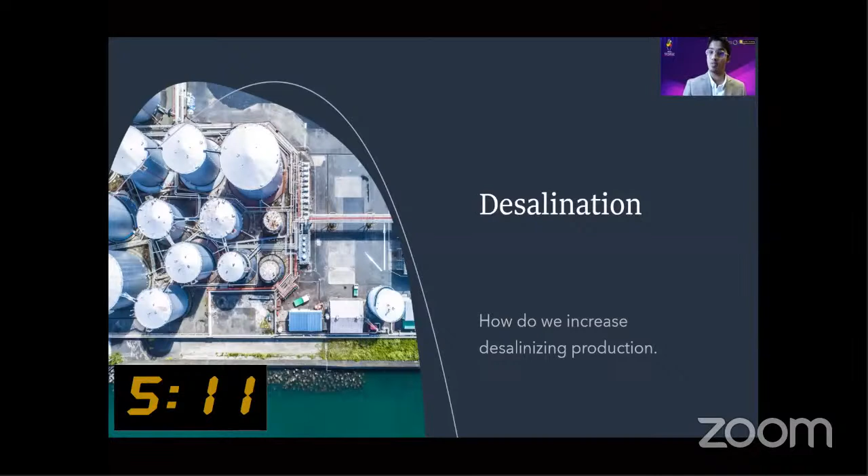It is such a great pleasure for us to share some of our ideas that we have come up with to increase the production of desalination plants in Dubai. But before going to those methods and ideas, what is desalination? It is the removal of salt and impurities from seawater to produce fresh water.

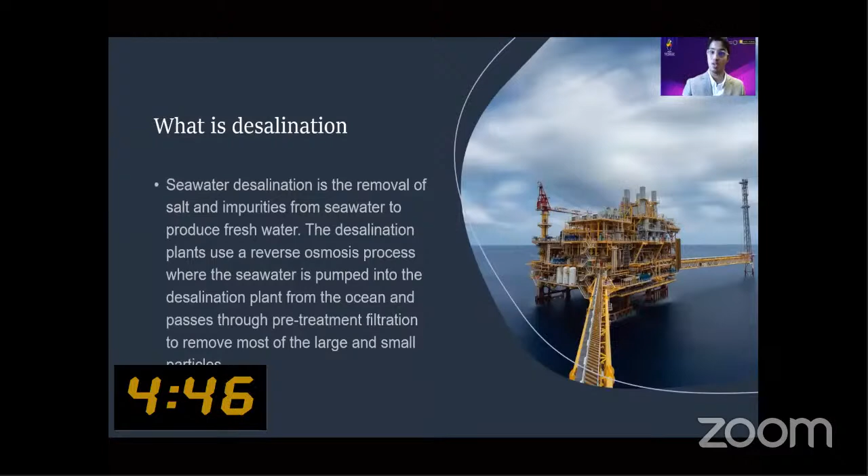And the process which is used in these desalination plants is something called the reverse osmosis process, where the seawater is pumped into the desalination plant from the ocean and passes through pre-treatment filtration to remove most of the large and small particles. So basically, we've come up with three different ideas or three different methods. These methods not just increase the production, but are also eco-friendly and quite sustainable.

So the first thing is we've come up with an IoT device for a more affordable and efficient desalination process. Here we will use an IoT device that splits components of brine through a method called electrochemical water salt splitting. The water salt splitting separates the brine into positively charged sodium and negatively charged chloride ions with the use of an electrochemical cell, which is a device that employs electrical energy to kickstart chemical reactions.

Once the bonds are broken, sodium and chlorine combine with other elements to form new chemicals, including sodium hydroxide, hydrogen, and hydrochloric acid. Doing a little bit of research on this, we could identify that this process not just reduced the cost, but also outperformed the conventional water splitting method. Number two, it can improve the desalination design to save operating costs while generating revenue. And the new approach could also help cut brine disposal costs.

But what surprised us the most during the research is that up to a third of total desalination expenses relate to brine disposal costs. So using this new method, we could help cut brine disposal costs, and we can also avoid damaging environmental impacts, because the current brine disposal methods can cause salinity and acidity spikes, along with oxygen-deficient conditions in waterways that kill or drive off animal and plant species.

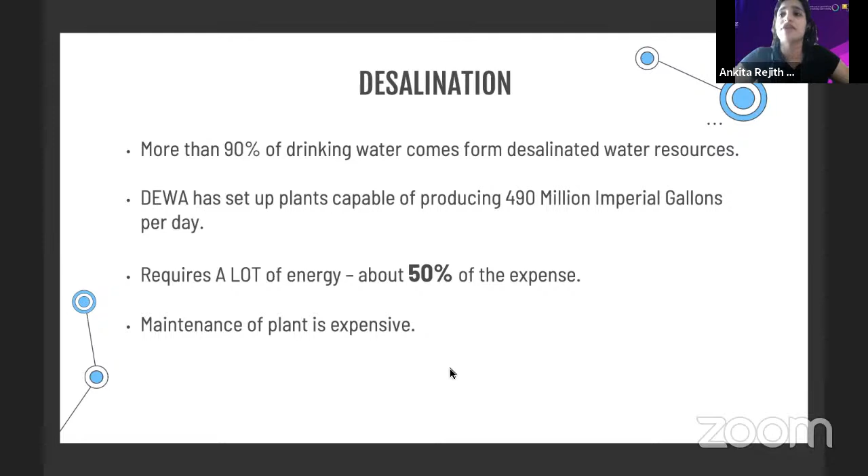We don't have much groundwater in the UAE, and more than 90% of drinking water comes from desalinated water resources. DEWA has set up desalination plants capable of producing 490 million imperial gallons per day. And the process of desalination requires a lot of energy, and the plants are also very expensive to maintain. Energy is reported to be the largest single expense for desalination plants.

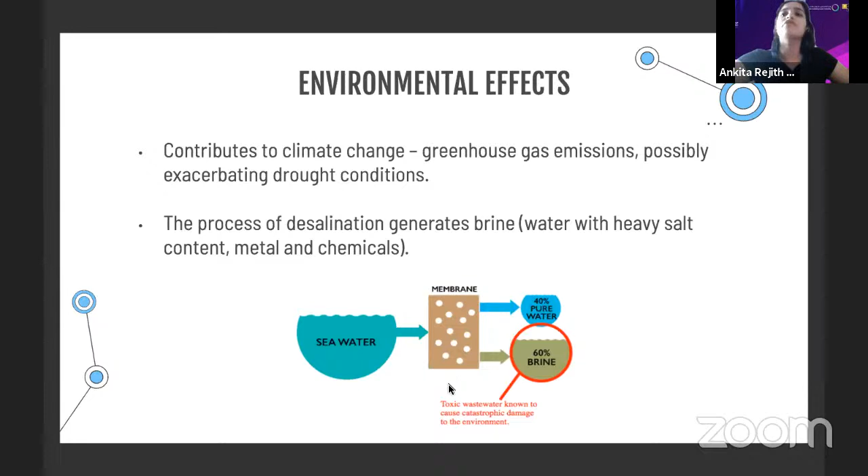Besides that, water desalination can have serious implications on the environment since the process can generate toxic waste such as concentrated brine, which is harmful to aquatic life. The massive amounts of energy used in desalination contribute to climate change, causing greenhouse gas emissions. And we have to deal with wastewater as well. A more sustainable alternative that must be considered is thermal desalination. It can be achieved through solar technologies, which are capable of producing large amounts of heat, which can be utilized in evaporating the saline water.

Our solution is to install solar-powered sensors in the plant that can give information about the water levels, heat, and salinity. This information is then transferred to a cloud computing platform that can observe, analyze, and compare data. The solution is based on narrowband IoT LPWAN technology. And we have sensors that have photovoltaic cells and AI to monitor the different levels. Now, this removes the requirement of installing mechanical components that are expensive.

This makes it cost efficient, which will help in reducing the water and electricity charges of the consumers, which makes them happy, which is also a goal of the Dubai government. And the proposed solution is also environment friendly as renewable energy is being utilized.

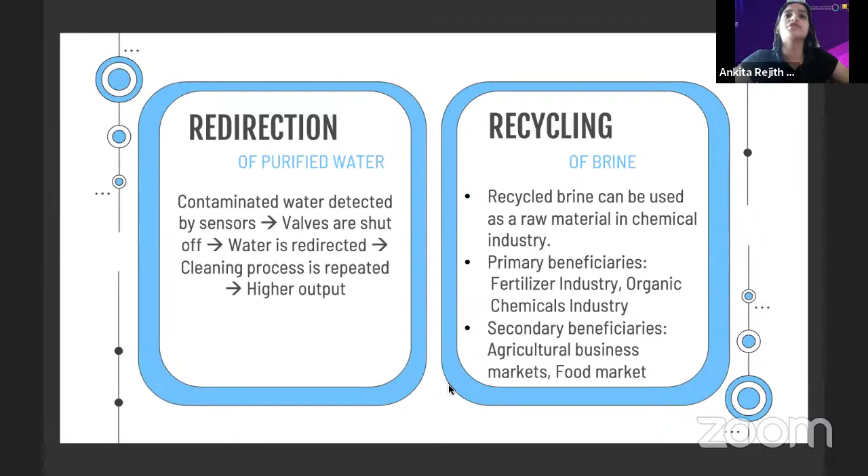Now, for the purified water, the sensors that detect contaminated water will give an alert, which will redirect the valves to be shut off. And this will initiate the cleaning process, which would be repeated until higher output is achieved. And the brine that we're left with can be used as raw materials in different industries, such as the chemical industry, fertilizer industry, or can even be used in agricultural business markets. Now I'll hand over the presentation to Suhani and Drashti.

In the PESTEL analysis, looking at the political factors that our solution affects, the UAE's commitment to the Paris Agreement with the target of reducing emissions by 25% before 2030 means establishing the Internet of Things framework and cloud network with our solution, which will increase the longevity of the solar farm and also make solar energy production in the UAE more reliable and a more effective substitute that can eventually substitute electricity originating from fossil fuels.

And the cost reducing measures that are enabled by our Internet of Things solution would mean that increasing the general level of happiness within the public will also be possible with our solution, which is one of the many priorities in the 2030 Dubai vision.

Now, moving on to the economic factors. DEWA's recent public listing and the increased productivity and efficiency created by our solution means there will be an increase in confidence in the stock market towards DEWA, and possible equity capital will be received from stockholders. This equity capital could be used to offset the initial startup costs of putting in our sensors in the desalination plant, and would also be used to further develop other sustainable solutions that DEWA departments are trying to adapt for Dubai's energy demands.

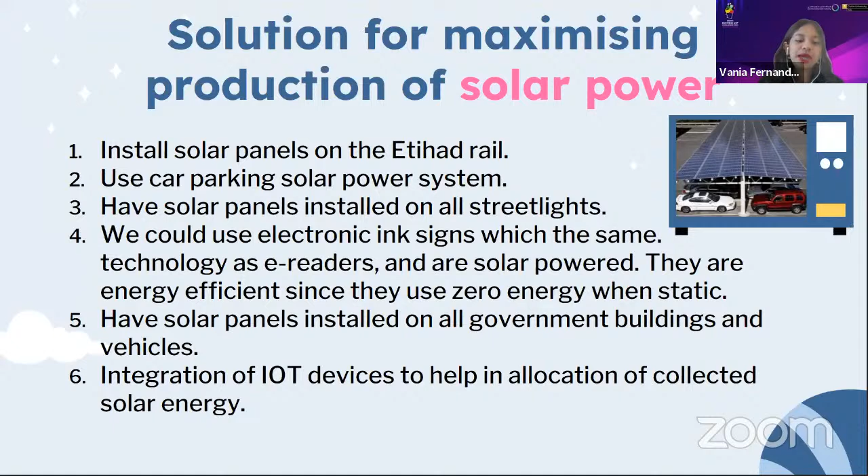These are our solutions to help maximize desalinized water produced by DEWA facilities. The first thing is that solar power panels can be installed in all desalinization plants. The solar energy derived from the panels can be used to fuel the desalinization machinery since it uses an extreme amount of electricity. This would help decrease fossil fuel dependence and save on electricity consumed.

The problem with desalinization plants as of now is that they have increased fossil fuel dependence and emit a lot of greenhouse gases. Not only that, but they are a threat to marine life. Sea life can get sucked into desalinization plants, killing small ocean creatures like baby fish and plankton. We would not want this since UAE is a country focused on environmental protection.

So what we can do is save on the electricity used for desalinization plants, and use this money saved and put it towards marine life conservation. The next point is that using solar energy can also help increase productivity, since sustainable solar power can produce more than 1.5 gallons per hour for each square meter of solar collecting area.

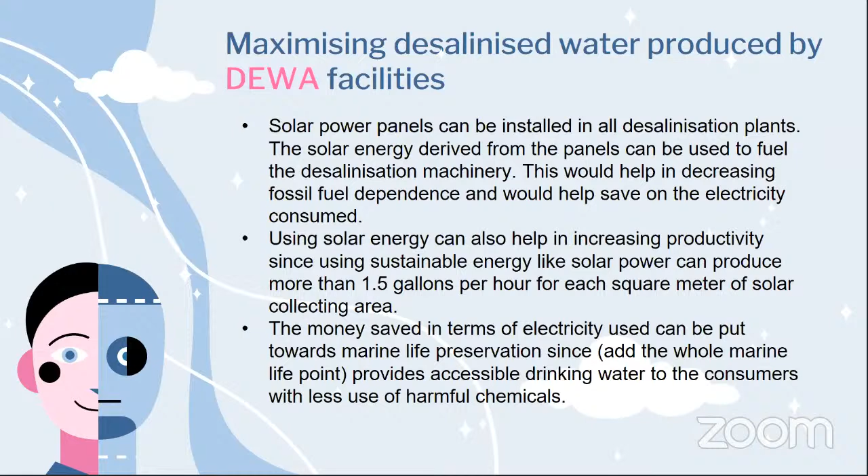Next. This is the SWOT analysis that we have conducted. The strengths of our proposed idea are that it saves money, increases productivity, and reduces dependence on fossil fuels.

However, the weaknesses are that it takes a long time to install the solar panels, and the initial cost while switching to solar power can be quite high. The threats we face are that it requires compliance from various departments—we need the government buildings involved, the parking lots involved, and a whole lot of things.

There is also a long period of time for implementation, since the cost savings of solar power energy come only in later dates. The opportunities are increased environmental benefits—we can reduce our dependence on fossil fuels and gain a whole bunch of environmental benefits from using sustainable and renewable energy sources. The money used on electricity expenditure can also be allocated to various other ventures.

I would like to take this time to talk about our financial analysis. We would definitely need a lot of money to install the solar panels. However, that is just an initial cost—one you have to think about only at the time. The benefits are for the long term.

We can use the money that has always been put towards electricity and put it towards so many other projects of great importance, such as saving marine life. We can also help develop the environmental protection projects already existing in the UAE. Thank you.

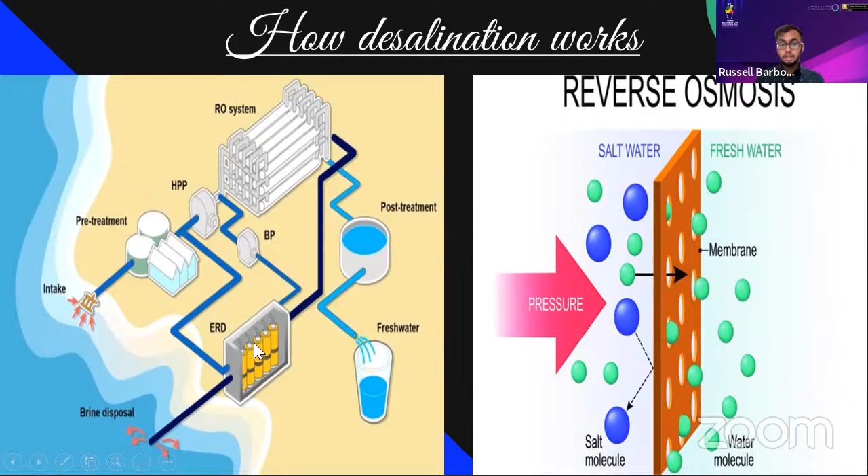I will skip this for now, as we all know how solar panels work. The advantages of the process: obviously these two processes use renewable energy, which is almost unlimited, and that's why we are seeing a shift of countries towards using these processes.

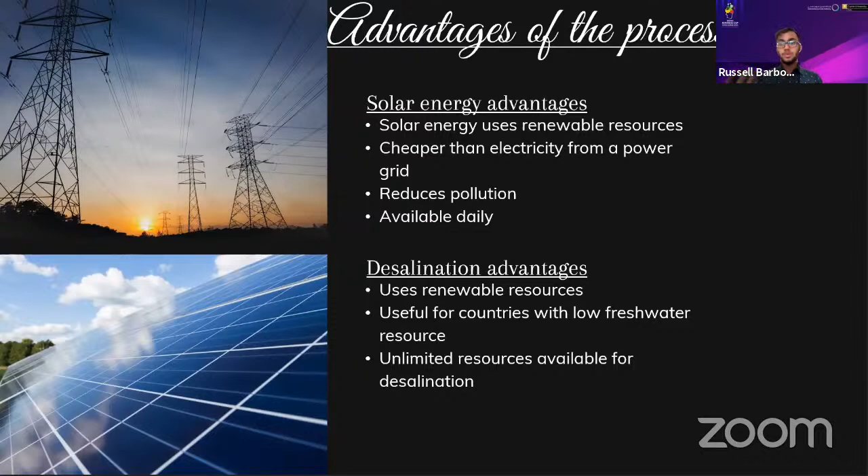Now, the disadvantages of these processes are what this solution is trying to address. The disadvantage of solar energy is mainly overheating; if the solar panels overheat too much, they become inefficient, so we are not getting our money's worth. Similarly, in desalination, the membranes involved could be fouled, meaning large particles get trapped on the membrane, reducing its efficiency.

Our solution is threefold. First, we will talk about cooling solar panels using IoT. This 60% brine solution from the desalination process is eventually sent into the sea, affecting its salinity and harming marine ecosystems and sea life. Instead, we plan to use this brine to its best efficiency. Under cooling solar panels using IoT, we will place an aluminum jacket under the solar panels, and the brine solution will be passed under the jacket, thus cooling the panels.

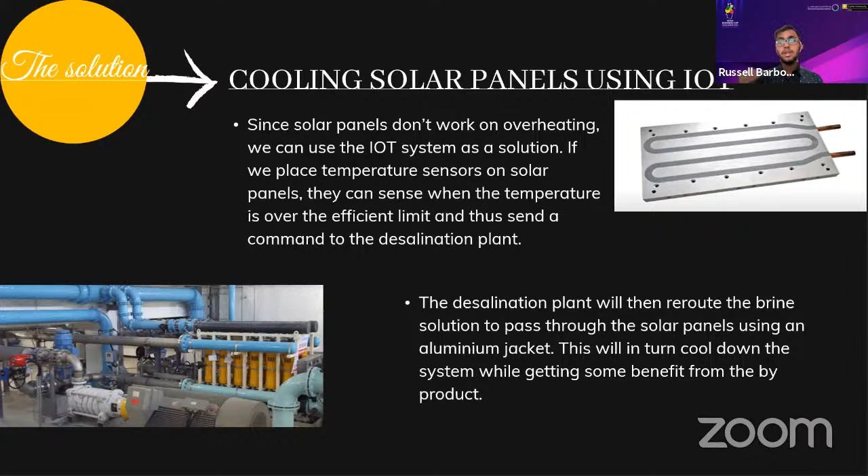To integrate IoT into the system, we will place sensors on top of the solar panels. Depending on the configured heat temperature, if it's hotter than it's meant to be, it will send a message to the desalination plant, which will proceed to reroute the brine solution under the solar panel using the aluminum jacket.

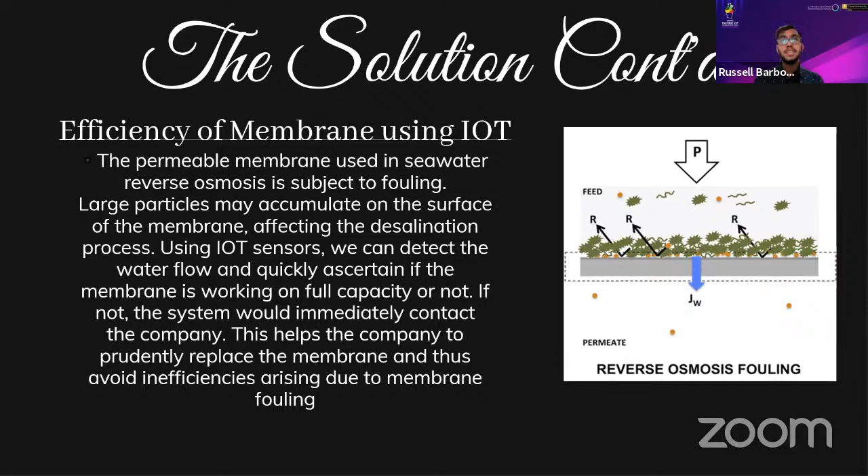Also, the efficiency of the membrane using IoT. As I mentioned, the membrane can be fouled, meaning large particles get trapped on it, reducing its efficiency. Using IoT sensors, we can assess the water flow and analyze whether the membrane has been fouled or not, reducing time wasted due to the inefficiency of the membrane.

This is where the brunt of my solution lies. This brine solution can finally be used for a salinity gradient power plant. In the salinity gradient power plant, we account for the difference in the salt concentrations of two solutions. In this case, it will be brine and seawater, and we can use that to generate electricity.

How this works. As you can see in the diagram, there are two solutions, and water moves from the dilute solution to the concentrated solution through a membrane. This generates electricity, which can further increase the energy production in the country. At the same time, using a process known as membrane distillation, we can also produce excess fresh water, which means that this process is not only using waste products, but we're also generating more energy and water for the community.

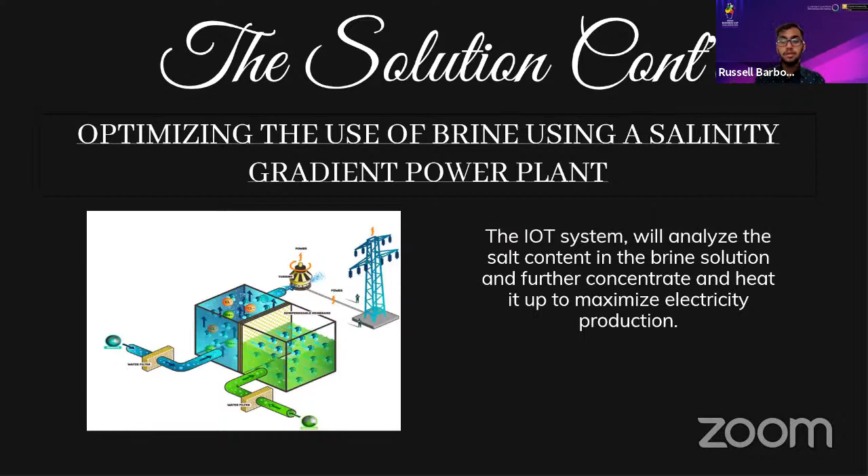The PESTLE analysis. The salinity gradient power plant is a relatively new process, and it has barely started on a large scale. Therefore, it may be important for the government to talk to companies that sell membranes related to the salinity gradient power plant and achieve good prices for the product. Also, the membranes in the salinity gradient power plant are 3 times more expensive than normal membranes.

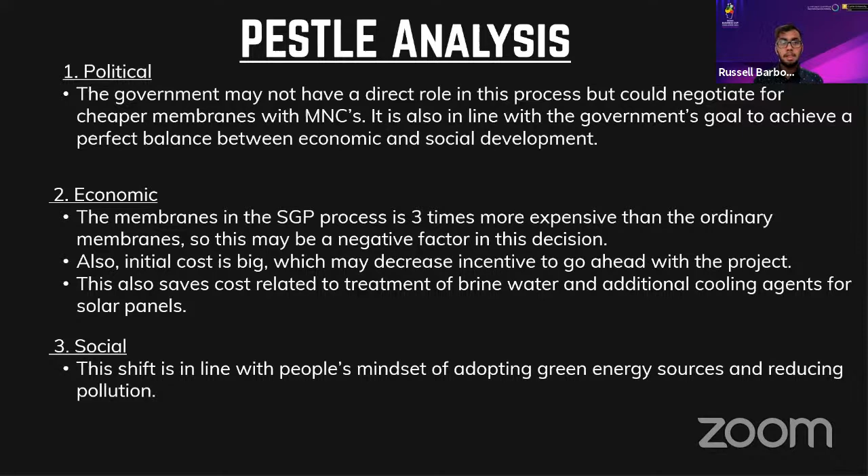Next, economic. Obviously, the startup costs of this solution may be large. However, as I will explain later, this will provide a lot of economic return. Social. There has been a shift in people's mindsets about global warming and the negative effects of pollution in the community, which is why this is in line with that. Technological. We are integrating the IoT system in this process, which is why we are also technologically advancing the two processes.

There are also patents. Again, as I said, this project is relatively new, which is why patents will also need to be acquired. Environmental: solar energy and desalination of water are both processes that produce less pollution for the environment, which is why they are good for the environment, and why this process is necessary.

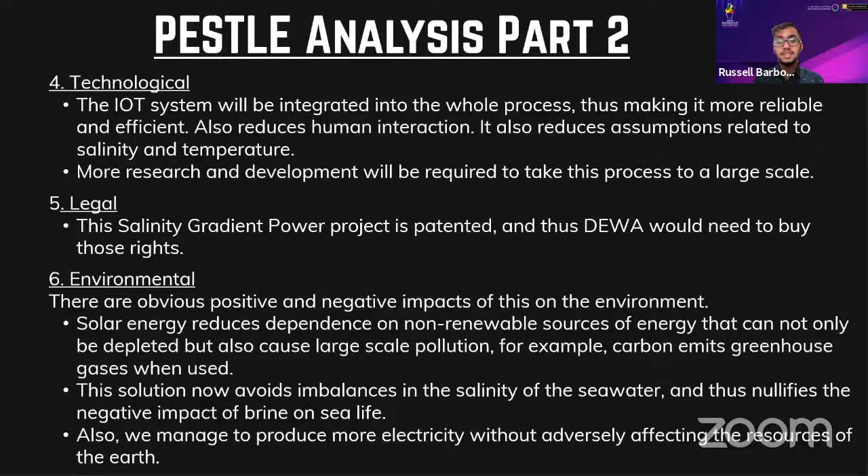The financial plan. As I said, this process is a relatively new one, so finding specific values was hard. However, we could find that the levelized cost of electricity is 0.21 dirhams per kilowatt hour. This means the cost of producing 1 kilowatt hour; it is basically the total cost divided by the energy produced. So the cost per 1 unit of energy produced.

Now, as you can see, DEWA sells electricity at a minimum of 0.23 per kilowatt hour, whereas the levelized cost of electricity under the salinity gradient plant would be 0.21 dirhams per kilowatt hour. So we will thus be making a profit from this process. So overall, the feasibility of the salinity gradient plant is good, however, this has only been adopted on a small scale. So to take it to the next step, DEWA would have to spend money on research and development and various improvements to the process.

However, we are saving a lot of the electricity that has been wasted on the brine, and we are also generating enough electricity to meet the needs of the desalination plant. So we're basically establishing a cycle where the desalination plant will not need any excess electricity.

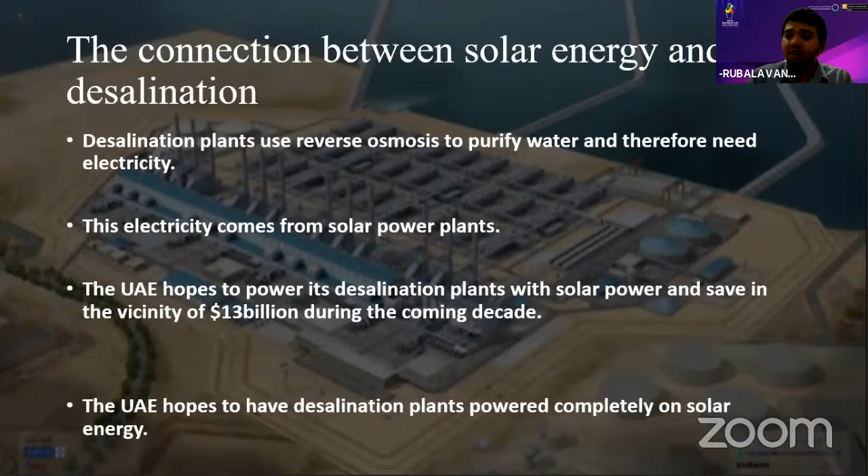Given this, after extensive research and analysis, the biggest problem faced by solar power in the UAE is dust and sand buildup. Dust and sand buildup can reduce the efficiency of solar panels by up to 40%. And research suggests that in the Arabian Peninsula, more than 80% of energy loss is attributed to dust and sandstorms. It must be noted that the UAE has a very dusty climate.

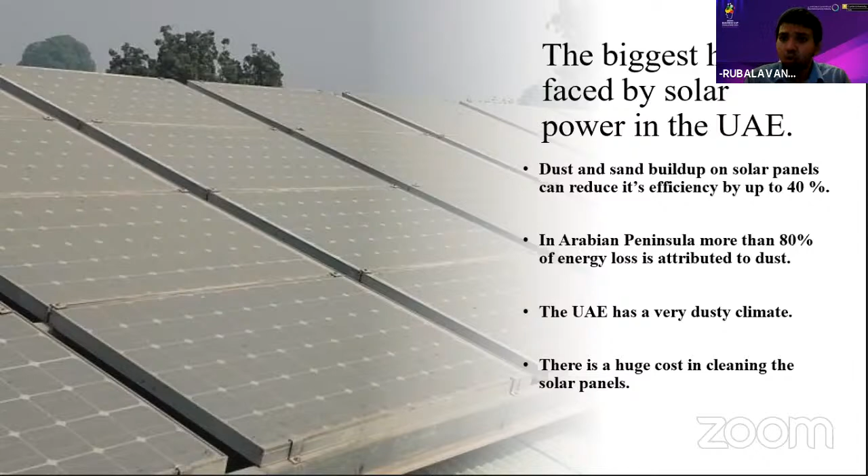There is a huge cost in cleaning and maintaining solar panels right now. The current approach to cleaning these panels is not well coordinated. It is not very proactive. There are some cameras that can monitor the dust, and steps towards being proactive are taken, but it is not very proactive. The current cleaning methods require staff that need to stand by all the time, and sometimes they are wasted because there is nothing for them to do. Therefore, there is a total lack of efficiency and productivity in this current approach.

The solution that we have has three main components. Two are technological, based on IoT, and one is mostly political and organizational. First, I will explain the technological solution. There would be IoT sensors and associated water splashers installed in solar panels. These IoT sensors, as suggested by researchers from AUS this year, can increase the productivity of solar panels by up to 50%. These IoT sensors will be connected with data mining and data analytical tools in the UAE and later in all the other GCC nations.

I call for a complete integration of the IoT sensors with all the tools DEWA has to maintain its solar power plants. After a few years, DEWA will be able to predict which panels, especially what parts of the panels, become dusty at which points in time. Therefore, repair and maintenance can be done much more proactively than it is being done.

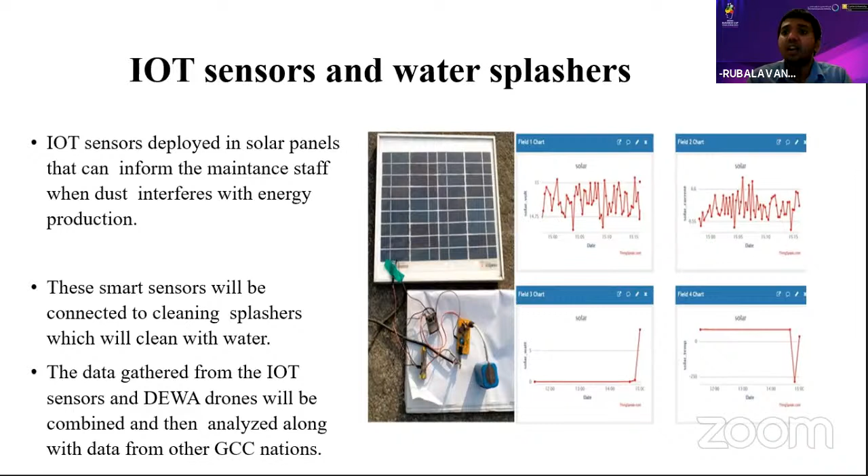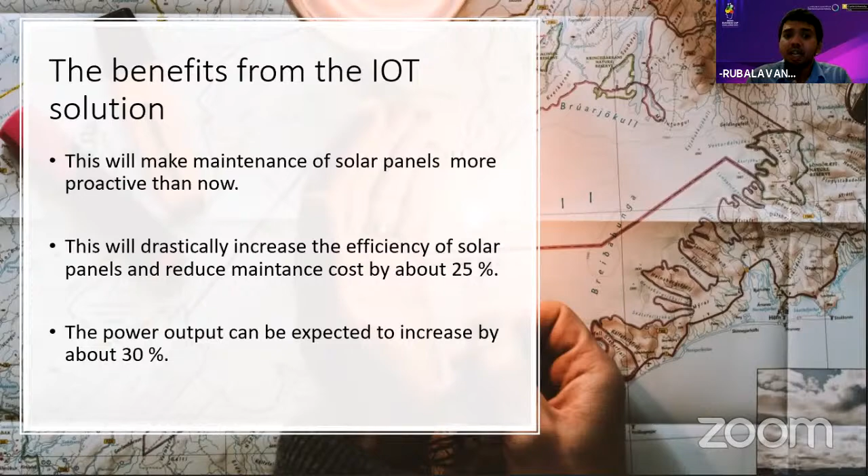The second part of it is adding water splashers. These water splashers are simple, and they will spray water on the solar panels once there is accumulation of dust. This water will be saved, recycled and reused. Therefore, this is another step towards sustainability. The benefits from implementing this IoT solution: this will make the maintenance of solar panels much more proactive than now. This will drastically increase the efficiency of solar panels and reduce the maintenance costs by about 25%. Therefore, the power output can be expected to increase by 30%.

The further benefits of the sensors are simple. The maintenance cost will decrease because resources can be allocated more efficiently and in a proactive manner. The second most important thing is that the data gathered from these IoT sensors will be analyzed by our data mining tools, and therefore a pattern could be found of when there is a need for maintenance and repairs. This will enable the proactive cleaning and maintenance of solar panels.

The twist. This is the organizational and political solution. The IoT sensors can be connected to DEWA drones and to other weather sensing organizations in the GCC. This will show unprecedented integration of proactive maintenance of solar panels. This is our creative twist. This will allow us to have more data from not just the UAE, but also other GCC nations. And the data will be analyzed much more efficiently using the Internet of Things, because the Internet of Things can connect the sensors on all kinds of assets, and information could be gathered from it.

The complete integration of solar power maintenance and repairs. This would include the integration of cameras and DEWA drones, desalination facilities in the UAE, and later the GCC. This will be a quantum leap in proactive maintenance of solar panels, never before seen in the Middle East. Damage from sandstorms can be reduced because they can be proactively predicted, and steps can be taken to minimize damage to solar panels. The PESTLE analysis.

At first, there is a need for major political coordination among GCC nations. Environmentally speaking, there will be a reduced carbon footprint. Socially speaking, the acceptance of solar power as renewable energy will increase because solar power will become more reliable. Technologically speaking, it utilizes IoT sensors, water splashers connected to IoT sensors, data mining, and integrated IoT communications.

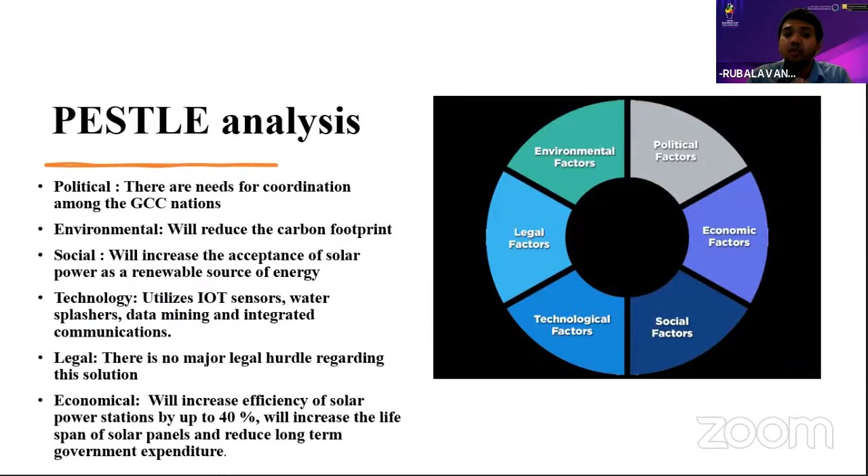Economically speaking, this will increase the efficiency of solar power stations by 40% and increase the lifespan of solar panels, and therefore reduce long-term government expenditure on solar energy. The return on investment. This is very, very important. To give the basics of return on investment, the cost of this integration of our solution will be 34 AED per 6 square meters. Why I chose 34 AED per 6 square meters?

Because generally speaking, it takes 6 square meters of photovoltaic solar panels to generate 1 kilowatt hour. This will be used in our calculations later. The increased productivity of solar panels will be more than 40%, and the lifetime of solar panels will be increased by more than 20%. The cost of solar panels per 6 square meters is about 700 AED. There will be an increased lifespan of our solar panels by about 20% because of our technical add-ons.

This will amount to a savings of 140 AED per 6 square meters. That will account for a total of 85 million AED savings for the entire UAE solar plants. Finally, the increased production created because of our solution will lead to an increased savings of 2 AED per kilowatt hour, which amounts to about 280,000 AED per day, which will lead to an annual profit of 100 million AED. With this, I would like to conclude my presentation.

However, I would like to remind the honorable judges and everyone here that this is a three-pronged solution. First of all, IoT sensors, and then water splashers connected to IoT, and we call for an integration of IoT devices all over the GCC, so this information can be analyzed using data mining technology, and we can proactively predict dust and sandstorms.

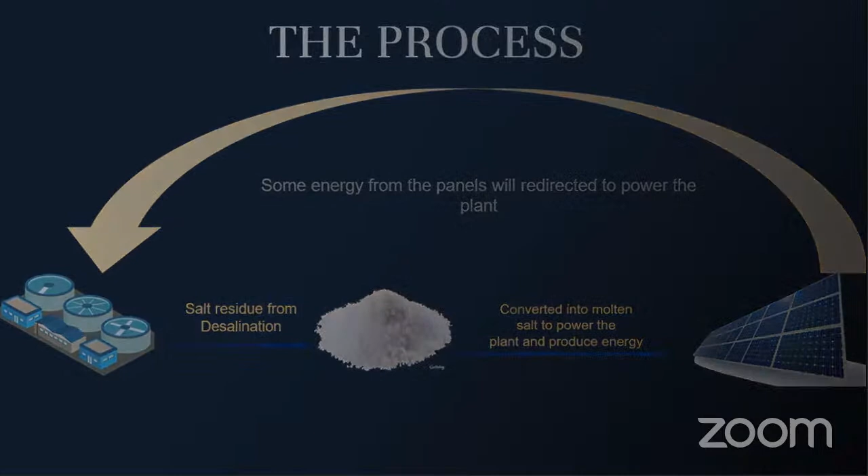Our idea to maximize solar energy and desalination is called sustainable energy production. Next. What is sustainable energy production? It is a way to create a sustainable plant where the salt generated from the desalination process will help in generating more solar power. Some of the excess power produced will be redirected back to the desalination plant, creating a no-waste sustainable energy production. This will help DEWA to be more sustainable since many energy companies are trying to produce clean energy.

It can reduce the need for fossil fuel energy when the sun doesn't shine. Molten salt facilities can operate at any time of day and store energy for up to 10 hours. Molten salt facilities are also cheaper. Energy is recovered during both the freshwater and seawater flushes with no upfront energy investment and no need for charging. So this means that the battery is constantly discharging and recharging without needing any input of energy.

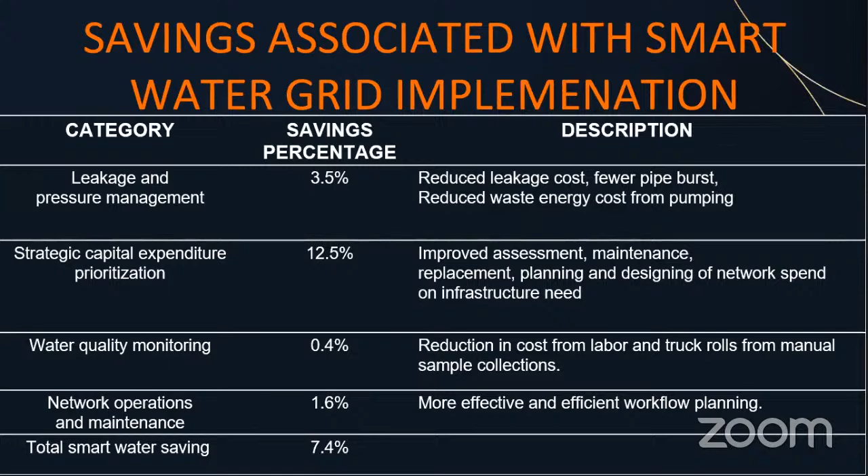Financial analysis. Standardization has led to the introduction of smart grid and data analytics thanks to the rise of the Internet of Things and big data analytics. The smart grid is an important part of the DEWA plan to build sophisticated infrastructure for Smart Dubai, which aims to make Dubai the world's smartest and happiest city. According to the source, the CEO of DEWA has said the smart grid comprises a program with investment of up to $87 billion that will be completed in the short, medium, and long term until 2035.